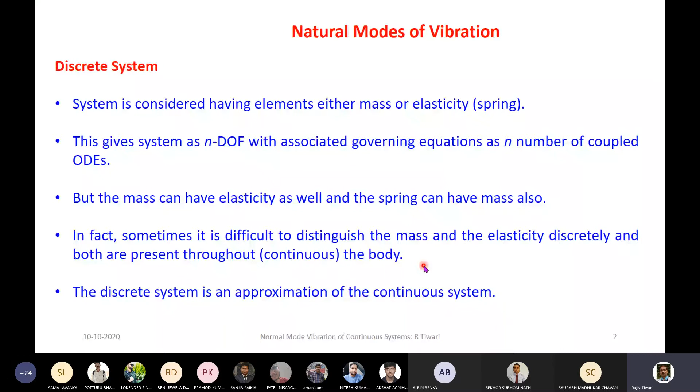So in the continuous system approach, we will be using the mechanics of deformable bodies, with which we'll obtain the equation of motion, and they will be partial differential equations. Depending upon the type of object we are dealing with, if it is a three-dimensional object, then we'll be having x, y, z coordinates to define the position of a point on the object. And that point can have three degrees of freedom in the x, y, z coordinate system.

So we will define the displacement of a point in that object as u, v, w, and they will be a function of x, y, z. So x, y, z is the coordinate of a particular point in a big object, and the whole object, if it is deforming, will have u, v, w as the displacement of that particular point, which will vary from point to point in that object, defined by the coordinate x, y, z.

And here, as we had in the discrete system, because we are dealing with the dynamic system, we'll have initial conditions to find out the free vibration analysis. But apart from that, in the continuous system we'll have boundary conditions, and that's why for the governing equation, which is a partial differential equation, unless we have boundary conditions we will not get a unique solution. Often these kinds of problems are called boundary value problems.

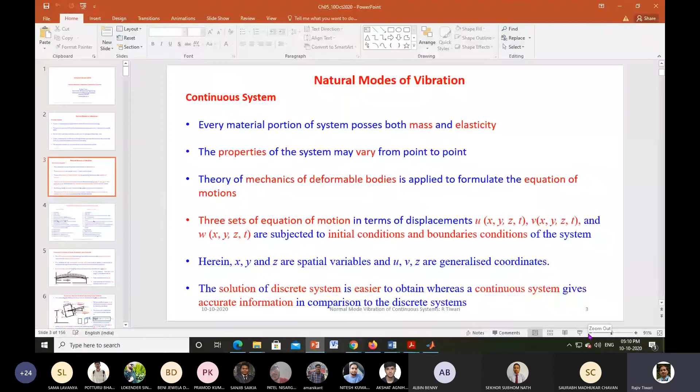So as I was mentioning, this is called a boundary value problem, and u, v, w in a three-dimensional object will be the generalized coordinates. They will be functions of the location x, y, z. So it becomes quite complex, three-dimensional.

So in this lecture and the subsequent 2-3 lectures we will only deal with objects whose displacement is a function of x only, not y and z. Or in the plate problem, x and y will be there, z will not be there. The three-dimensional case will be too complex to deal with in this course, so we will take only the two-dimensional problem.

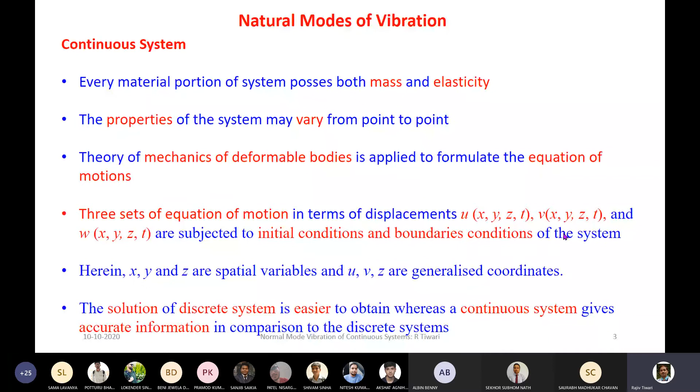So let us see the comparison between the discrete system and the continuous system. Some of the terminology put here we'll learn as we go through these lectures. But for the discrete system, you have some familiarity with the terms: we have finite degrees of freedom, like n degrees of freedom.

But in a continuous system, because we have an infinite number of points, and each point's displacement we define as a generalized coordinate, there is an infinite number of degrees of freedom. So the main difference is that the discrete system has finite degrees of freedom, we can count them, but the continuous system is an infinite degree of freedom system. In the limit, if we gradually increase the degrees of freedom of the discrete system and it becomes very large, these two systems may become the same.

Then the equation of motion in the discrete system is an ordinary differential equation, but in the continuous system it is a partial differential equation, with differentiation with respect to time as well as the spatial coordinates x, y, z. Ordinary differential equations are relatively easier to solve. Both equations are linear, but partial differential equations are more difficult to solve, and sometimes it is very cumbersome or impracticable to obtain a closed form solution.

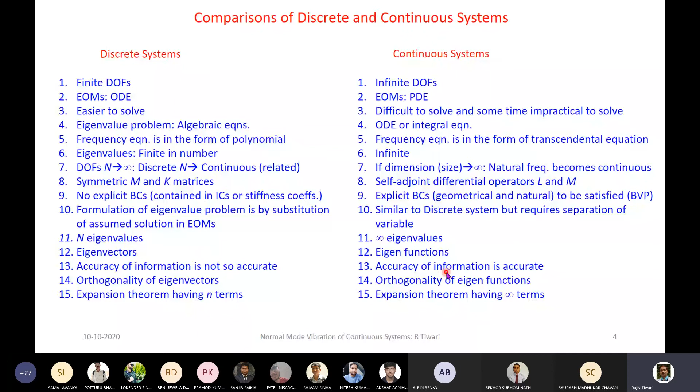So now I will take up one particular formulation. This is for bending of a beam. So we are talking about transverse vibration of a beam. Here, let us say we are considering a cantilever beam or simply supported beam, and the beam has enough inertia as well as elasticity, distributed throughout the span of the beam, and it can have distributed loading or concentrated loading. So P(x,t) represents the force per unit length, which is a function of x and time. x is along the length of the beam, so the distribution of the load can vary along the length.

So at present we are formulating for forced vibration, but in the present chapter mainly we'll be dealing with free vibration, so we'll drop this term. But in the subsequent chapters, we need to consider forced vibration, and then this may again come into the equation of motion. So here, we are assuming that the beam has distributed mass and stiffness properties. The beam can even have a varying cross section. Like here, I mentioned the mass m(x) per unit length.

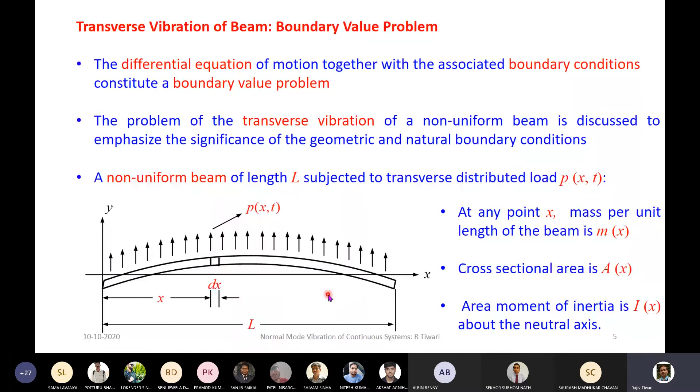So now we'll focus on this particular element. I'm taking out this element and trying to draw its free body diagram. So here is that small element, and during deformation it took this particular orientation. Here, this element has y displacement. Initially the beam was here, the static equilibrium position is here. So the linear displacement of the center of this small element is y. This is the translational or bending displacement, y, which is a function of x and t. So this displacement will change along the length of the beam. So this is one displacement.

Another is this phi x. Phi x is the tilt of this beam element because of the bending of the beam, pure bending of the beam. There is another angle shown here, beta, which is called the shear angle. What is shear angle? Shear angle is defined here.

So if you have an element like this, and you apply a force, let us say along the vertical direction, and you fix this end, it will shear like this. It will distort like this. But you need to observe that this vertical edge remains vertical, so it is not tilting, but the upper part got the angle beta, and this is the shear angle. In strength of materials, you have seen this concept in which if you apply a shear force on this edge, it gets distorted, and this is the shear angle. So this is the shear angle, and this is the angle due to the bending moment.

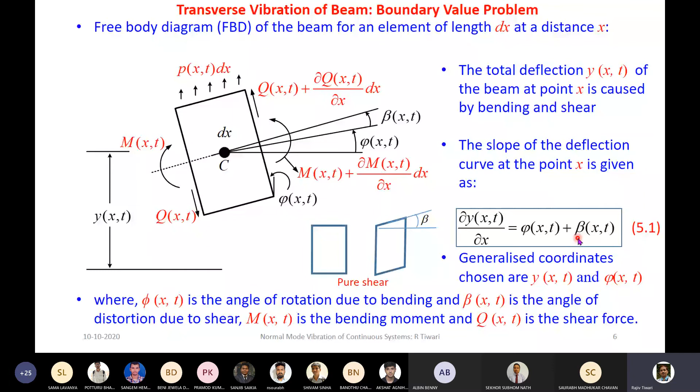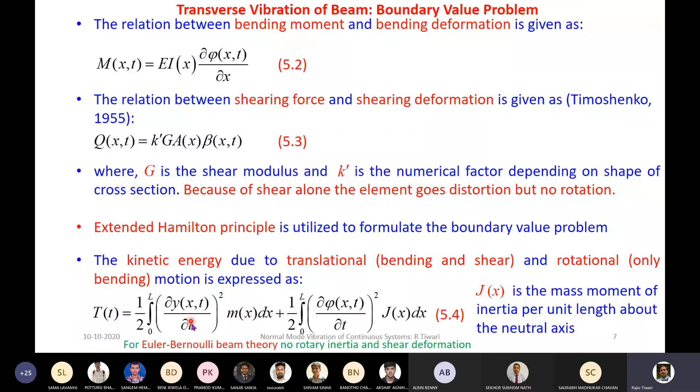So we have taken the variation of this because in the Hamilton principle, we need the variation of the kinetic energy term. So a priori, we are simplifying these expressions. Then in Hamilton principle, we have the virtual work. So virtual work has two parts. One is due to the conservative forces, another due to the non-conservative forces. And the conservative force part of the virtual work is related with the minus of the potential energy variation.

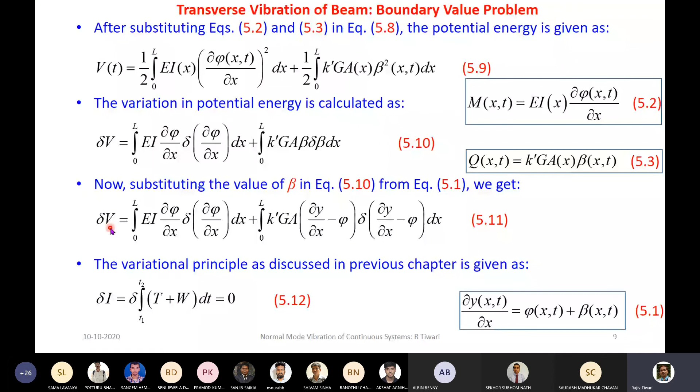So now we got all the terms in this variational principle: variation of the kinetic energy and variation of the work done. So we can substitute this in this equation to get the variation of the total work done. So now we will be substituting this in this particular variational principle. Here again I have written the kinetic energy expression after taking the variation, then the total work done, conservative part and non-conservative parts. This I am replacing with the expression we obtained in the previous slide.

Okay, so all these three expressions I am substituting now in this expression of the variational principle, or the Hamilton principle, which is basically the extended Hamilton principle. So now you can see the variation of T gives these two kinetic energy terms, and then we have the potential energy terms, 1 and 2. Two terms are there. And then the last one is as it is.

Now, just to have a compact representation, P as a function of x and t has been removed, but it is understood that P, which is load per unit length, is a function of not only x but also t, and the variation of y, which is also a function of x and t. So this is our variational principle. We have substituted the variation of the kinetic energy and the work done, both conservative and non-conservative parts.

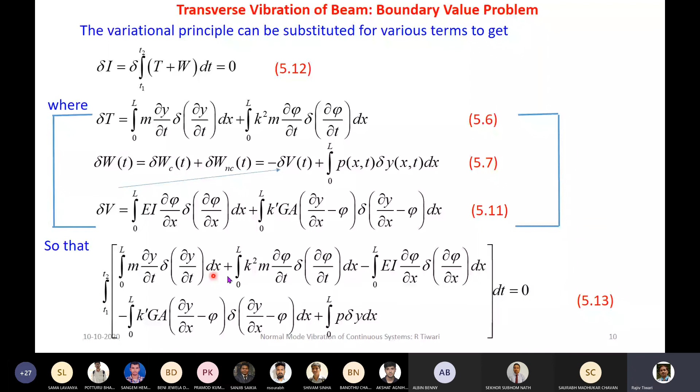So the same expression is expressed as this: this is the I1 integral, this is I2 integral, this is I3 integral, this is I4 integral, this is I5. So one by one we'll take, I1 we'll take first and like that, and we'll do the expansion of that, we'll simplify, and then once we are done for all the individual integrals, we will substitute here.

And then our aim will be to segregate all the terms containing delta y, this variation of y and variation of phi, in one place, and other terms not containing the double integral in another place. So that kind of manipulation we will be doing. So I'm stopping here. If you have any question till now, then you can ask.

The detailed integration by parts I will do in the next class, because that will require some time, 10-15 minutes, because these steps are very important. Because once you understand the steps, the procedure, if you have been given the kinetic energy and potential energy, you can systematically obtain the equation of motion.

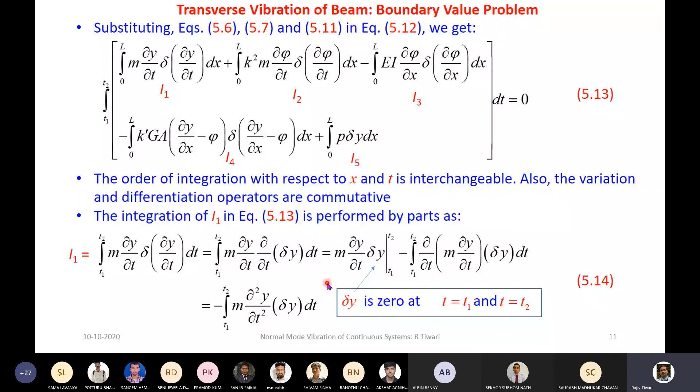So I will be going slow in explaining the steps so that you understand the steps, so that the rest of the things you can then mechanically do the formulation. So if you have any questions on this till now, you can ask. Any questions? Because this was general theory I explained. Basically, we are developing a Timoshenko beam theory, and, yeah, I think Bharat is having some question.

Sir, my doubt is not on today's topic. I have a doubt in the assignment. I have one of the questions which has dampers, sir. How to deal with it? Like in assignment 3, we have to find the natural modes and natural frequency. So can we neglect the damper coefficients? Like we can take C as 0. Okay, equation of motion you can derive, you know. Equation of motion is derived, sir. From that we have to find the natural modes and natural frequency, right?

For that you can ignore. Okay, sir. For the time being, you can ignore because we are not considering the damping in the natural frequency at present. But the equation of motion, I'll encourage you to obtain with damping and force, everything. As in today's formulation also, we are including all the effects, and depending upon the requirement, we'll drop some of the terms.